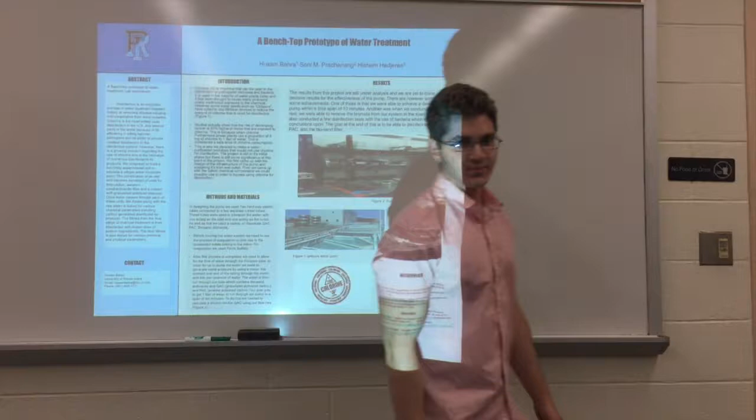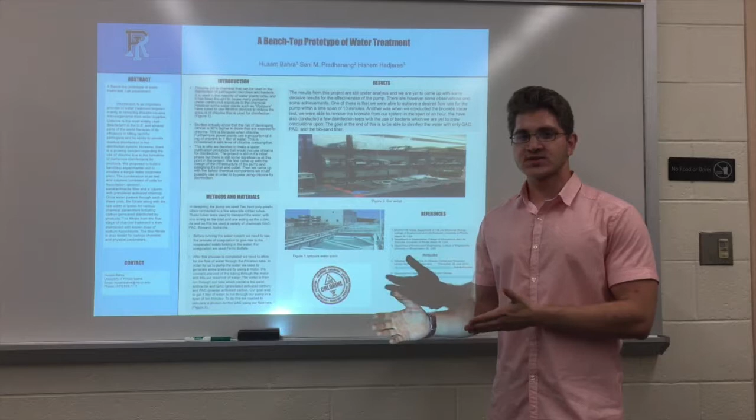I worked with Hisham and Soni Pradhanang in designing a water pump. First I want to start out by mentioning chlorine. Chlorine is a disinfectant used widely in water plants these days. Most water plants conventionally here in the US use chlorine to disinfect water. By using chlorine, we can eliminate microbes and microorganisms that are pathogenic, and thus reduce disease that is transmitted through water. The reason why this is bad is because chlorine is actually a very harmful chemical when ingested by humans.

Medically, if we're looking at chlorine, when it's ingested, you have a higher chance of contracting cancer or getting cancer when you take in chlorine. The reason why is because in the human body, there's a gland called the thyroid gland, located in your throat.

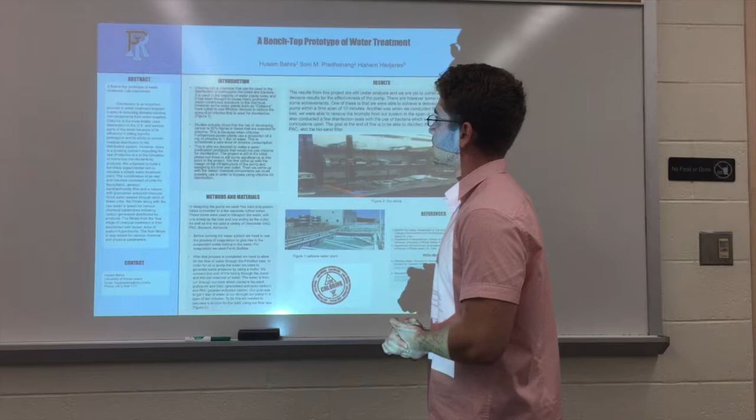Although there are many water plants that use chlorine, some of them have opted to use filtration devices to reduce the amount of chlorine in the water. Some of these, such as Optipure, which you see in the picture right here, have decided to use filters and filtration devices that would reduce the amount of chlorine, thus reducing the harm done through chlorine.

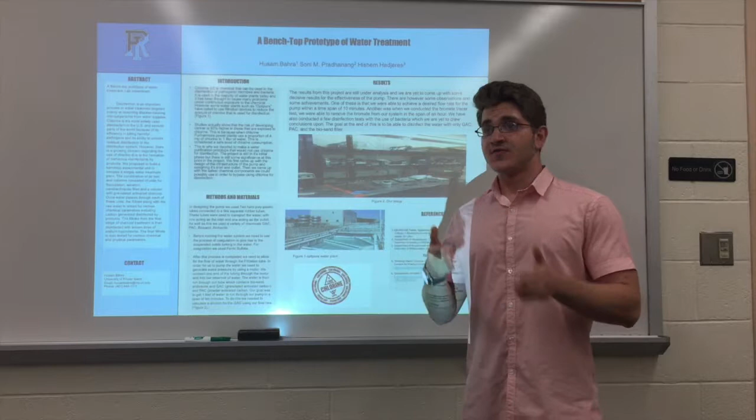The CDC imposes that there should only be 4 milligrams of chlorine to 1 liter of water. The reason why chlorine is so harmful is that it actually has a high chance of giving somebody cancer. Studies have shown that people have a 93% greater chance of getting cancer if they ingested or were exposed to chlorine than people who haven't. So somebody drinking chlorinated water has a 93% higher chance than somebody who doesn't to contract cancer.

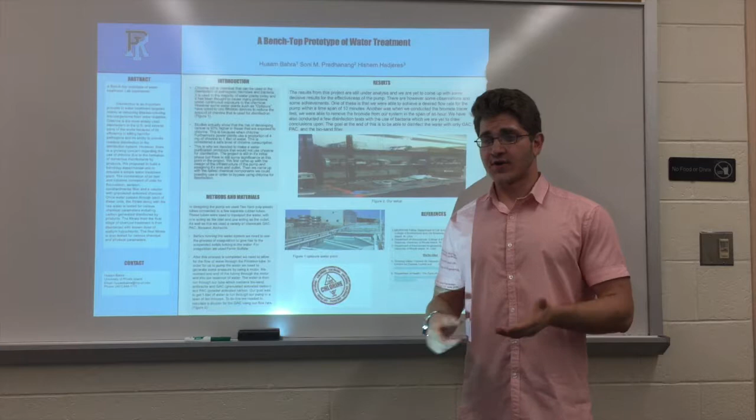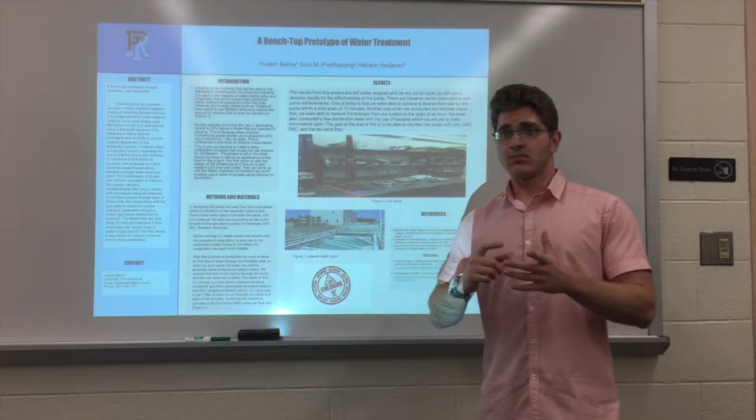The reason is that in the thyroid gland, when chlorine is ingested, it can act as an inhibitor, since the thyroid normally takes in iodine. When other negatively charged molecules, like other halogens such as bromide or chlorine, are present, the thyroid senses the negative charge and will take in the chlorine instead of the iodine. When it takes the chlorine in, it inhibits the use of iodine, which inhibits the function of the thyroid gland. If the thyroid gland's function is minimized, it can cause cancer.

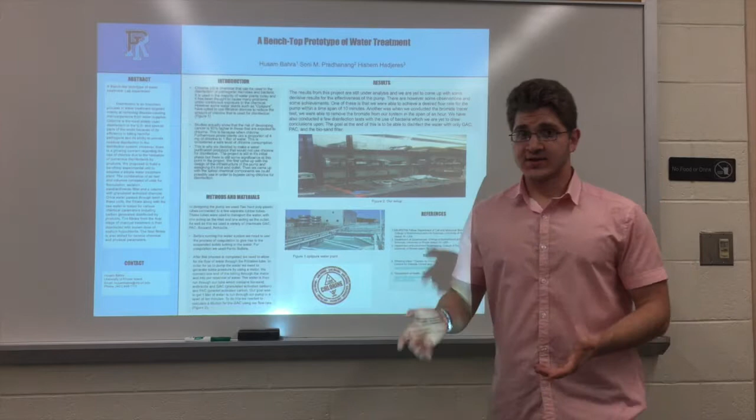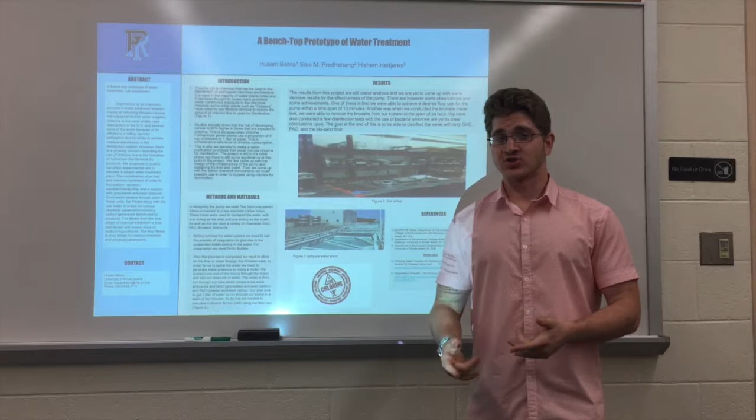Hisham actually had an idea to make a water device, a benchtop prototype of a water treatment device. This prototype would essentially not use chlorine for disinfection. All we would use is GAC, PAC, and biosand. GAC is granulated activated carbon, PAC is powder activated carbon, and biosand is basically a mixture of anthracite and sand. So in order to begin this project, we came up with the design for the pump.

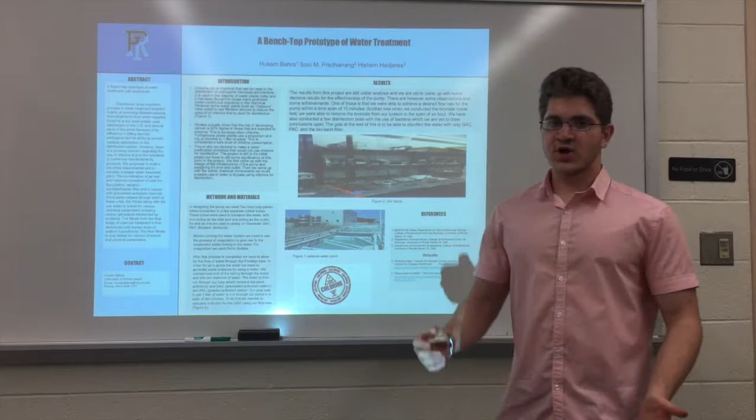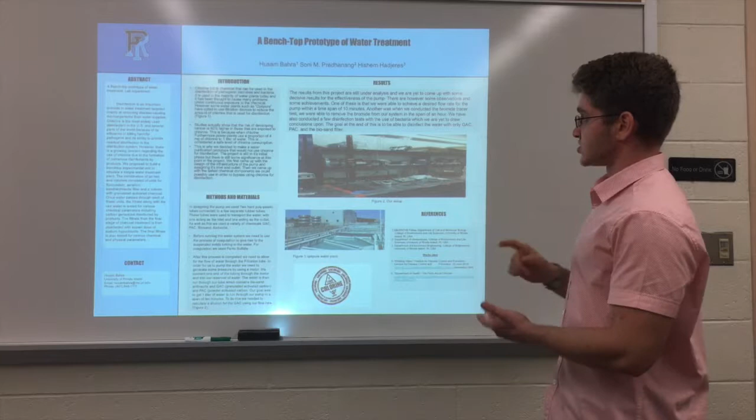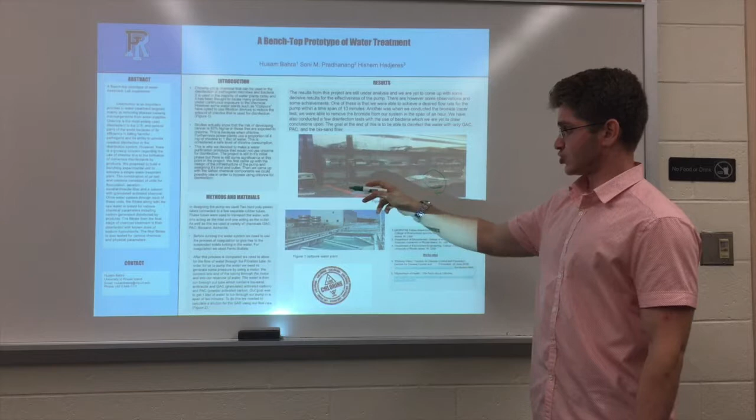We have 2 polyplastic tubes: one filled with our granulated activated carbon, and the other filled with our biosand and powder activated carbon. The water runs through that initial tube, through the reservoir, running up through the 2 tubes and back into our outlet, which is right here, and that's where the water ends.

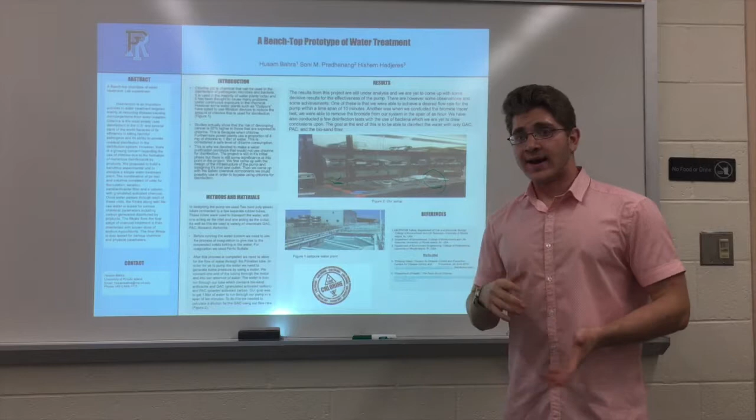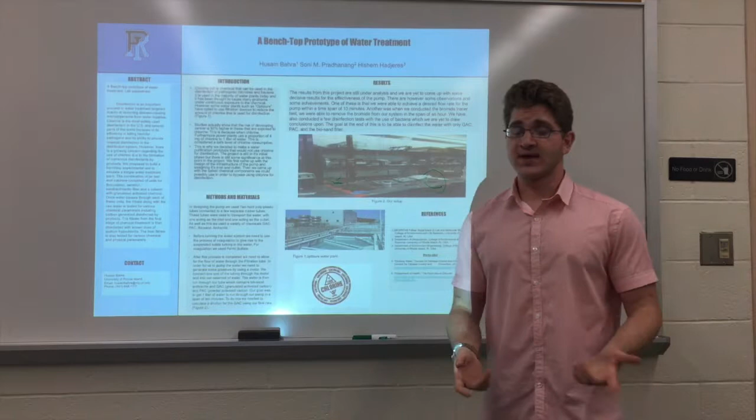By doing this, we theorize that it is enough to use the GAC, the PAC, and the biosand to disinfect the bacteria. Our methods before we actually start pumping require us to first coagulate whatever solids are inside the water. Through the process of coagulation, we need to use a chemical to bind to those solids and raise them to the surface of the water. The chemical we chose is ferric sulfate, which is mainly used in other water plants, and this chemical is fairly safe.

The initial goal of this experiment was to run a liter of water through our pump at a given flow rate and have it done in 10 minutes. The reason we chose 10 minutes is because that's the CDC recommended value for water pumps to have.

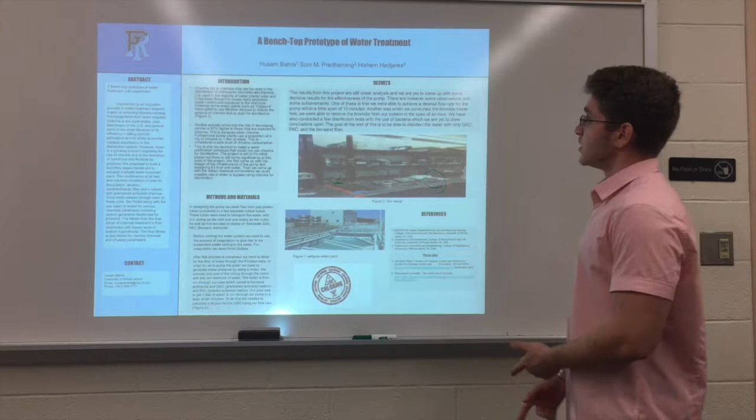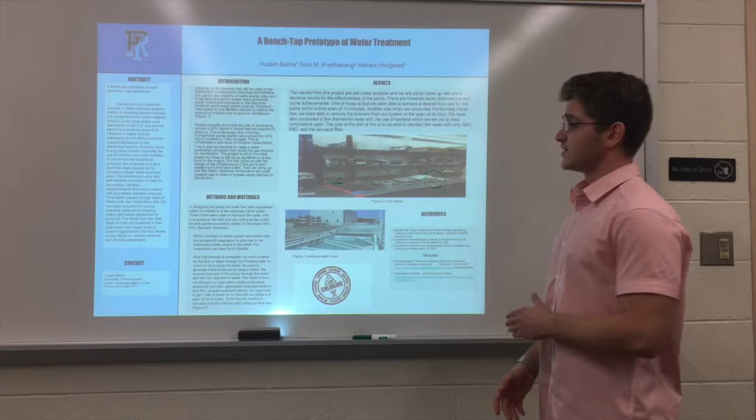Since this project is in its initial phase, we haven't had many decisive results. However, we did get some observations and achievements from the experiments we've done. One is that we were able to achieve a desired flow rate for the pump within a time span of 10 minutes. We also conducted a bromide tracer test where we were able to remove the bromide from our system within an hour. We also conducted a few disinfection tests using some types of bacteria, but we're yet to draw conclusions, though it's looking like it will be a positive result.

The goal at the end of this project is to basically create a water filtration device that does not use chlorine. Thank you for listening. You have a good day.